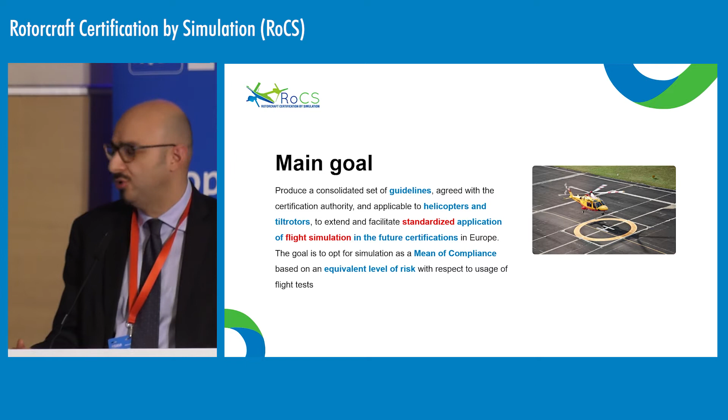And the goal is really to give the applicants the option to opt for simulation as a means of compliance based on an equivalent level of risk with respect to the usage of flight test. So I should probably clarify what we mean by an equivalent level of risk, because it could be quite misleading. For us, the risk is the probability of failure of a correct compliance demonstration times the consequences of this failing of correct demonstration.

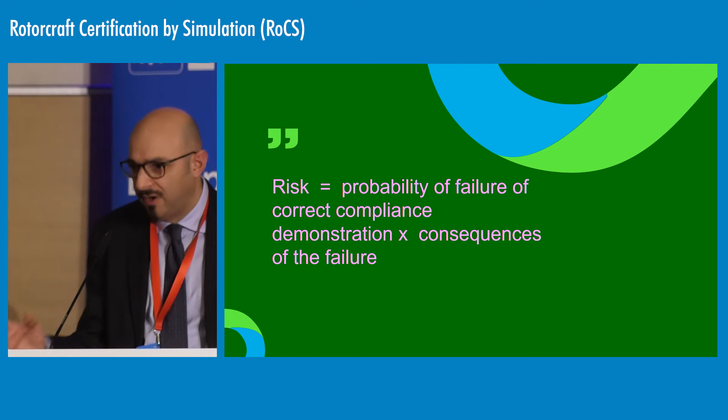So if we can bring the simulation up to the same level of a flight test, having the same level of risk, we will be successful in increasing the number of applicants that will use simulation instead of flight tests to certify at least portions of the certification activity of the aircraft. Of course, that will mean that the level of substantiation of the simulation to flight correlation should be commensurate with the level of compliance, meaning that the closer we are to being non-compliant, the higher should be the fidelity of the simulation. So this would really bring the risk to zero, possibly. But of course, this is a great challenge to be achieved.

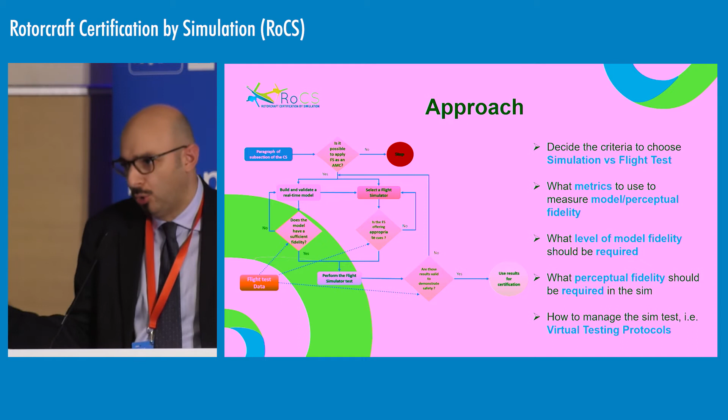Then we will have to develop a model that is able to achieve the required fidelity and to find or develop hardware that is able to bring the cues up to the level of fidelity that is required. If this is doable, maybe with some iterations, we can go and perform the flight simulator test. Of course, we will get some validation comparing what we do with the available flight test data. And then we will eventually produce documentation or output that could be used for the certification of the aircraft.

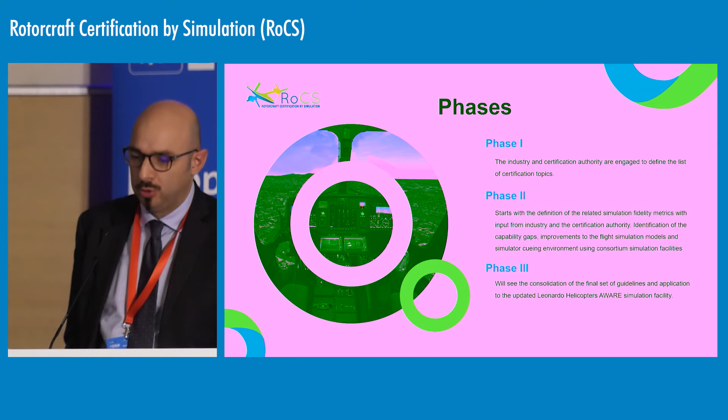This is just a brief overview of the schedule. We just started in June 2019. Right now we are entering into the crucial part of the project, that is phase 2, and we expect to complete the work at the beginning of 2022. We plan to organize the project in 3 phases. In the first phase, the one we are completing now, we engaged EASA as certification authority, and industry, in this case Leonardo, to define a list of certification topics that are of interest and suitable to be performed by simulations.

Then we will start the second phase where we'll really have to do the work of definition of metrics, both for perceptual fidelity and for models, to understand what are the capability gaps in terms of capability of modeling and capability of delivering the right cues in the right simulator, and try to fill the gaps and develop models that are appropriate for the task.

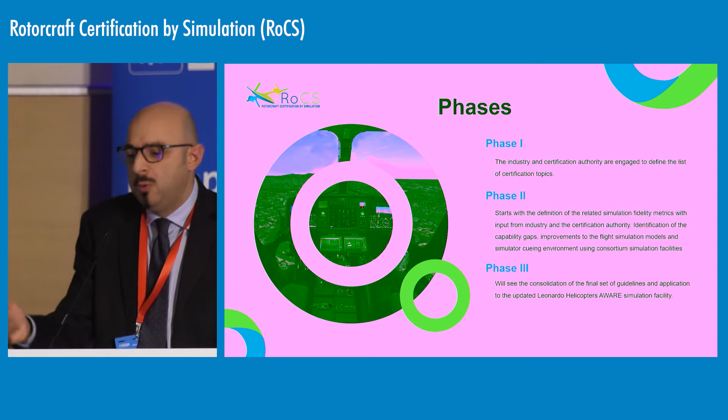Then in the third phase, we will try to apply the scheme, and so try to develop some certification tests in a simulator using a newly developed simulator at Leonardo plants. And we will deliver the guidelines out of the experience we gained in this third phase.

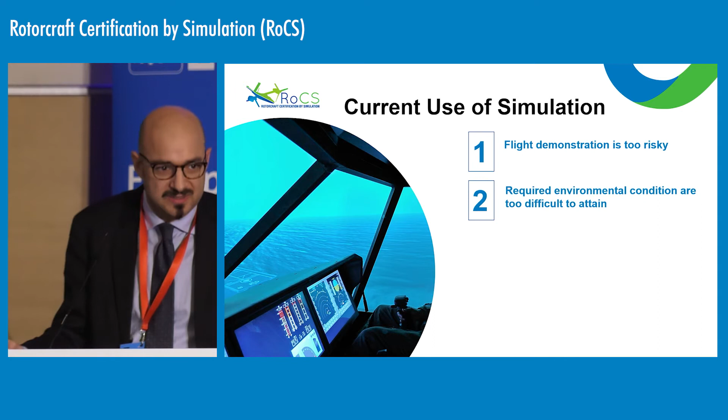So of course, we are not talking about nothing new. I'm quite sure a lot of applicants are already using simulation in some cases. The typical cases where you use simulation right now is when the flight demonstration is too risky, and in this case there is probably no other choice. The second case is the cases where the environmental conditions are too difficult to attain, or cases where you need to have repeatability and demonstration of a specific scenario with a range of pilots.

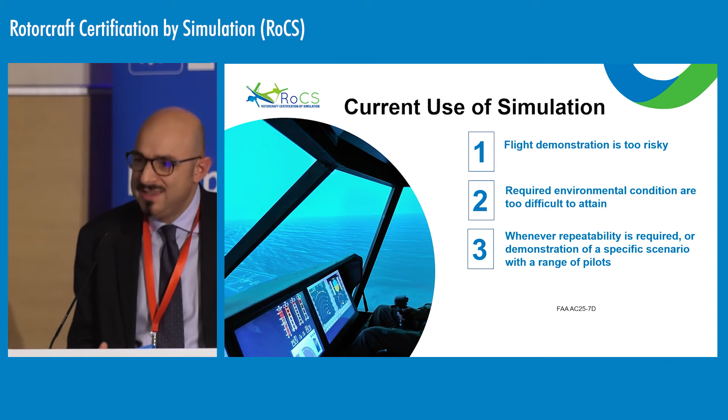So the idea we have is to extend the application of simulation out of those 3 cases to more general situations, because we expect that applying flight simulation will clearly improve safety. The simulation can anticipate risks, anticipate problems, reduce risks, and prevent risks in some cases.

Additionally, simulation will bring the costs of certification down. Flight tests are expensive. They require time, they require a lot of people. And so simulator can really reduce the costs. Also, there is no risk to damage the aircraft, as there is in some cases during flight testing.

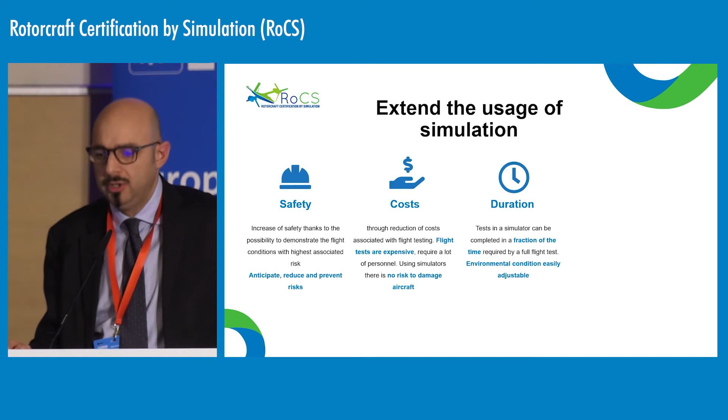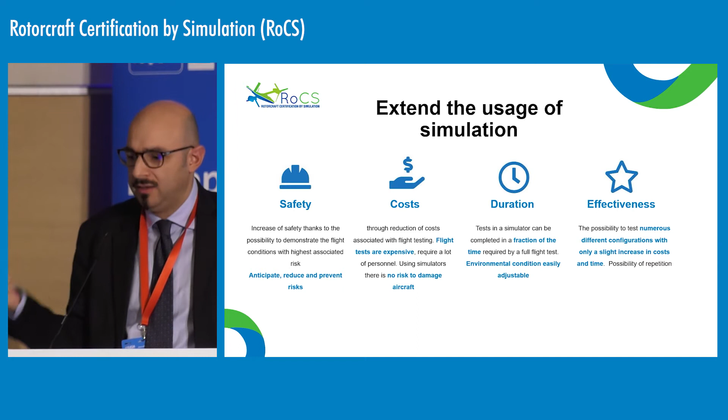Also, the duration of a certification campaign could be significantly reduced, going to a fraction of time of what is required by normal flight tests. Just to give you an example, environmental condition can be easily adjusted in a flight simulator, while when you have to perform a flight test, you have to chase the right place and the right condition in order to perform the required test. Finally, we expect flight simulators to be more effective, allowing higher repeatability of the tests and possibility to easily certify slight changes of configurations using the same simulator.

Of course, there are challenges, and the first probably major challenge here is extrapolation. This is taken from a guideline developed by FAA for fixed-wing aircraft, and they say the simulation should be suitably validated by flight test data for the condition of interest, but this does not mean that there must be flight test data at the exact condition of interest, because if you fly that condition, there is no point in doing it by simulation.

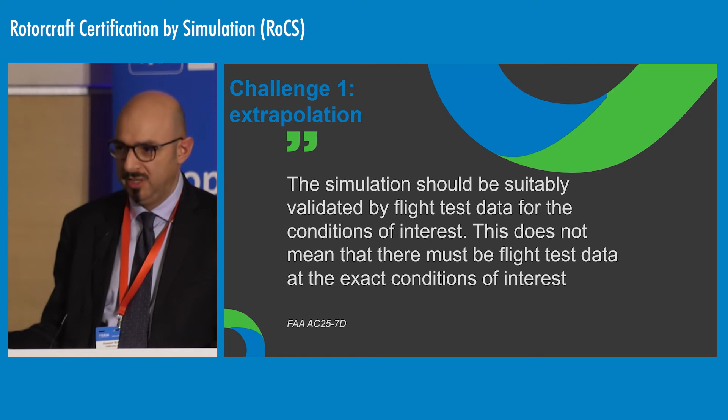So you definitely need to validate your model, but then you need to test it out of validation points. So you need to extrapolate, and you need to rely on the right physics modeling of your system in order to be sure that what your simulator is showing is reliable and is representative of what the aircraft is doing in that condition.

And so the second challenge that is related to the first one is really to develop a good credibility of the models used. And credibility means to reach a level where the user can say, I believe the simulation is credible and I'm comfortable in taking the needed decision with it, so with simulator. Because if I have to go and fly the test again, there is, again, no point in using the simulator for certification.

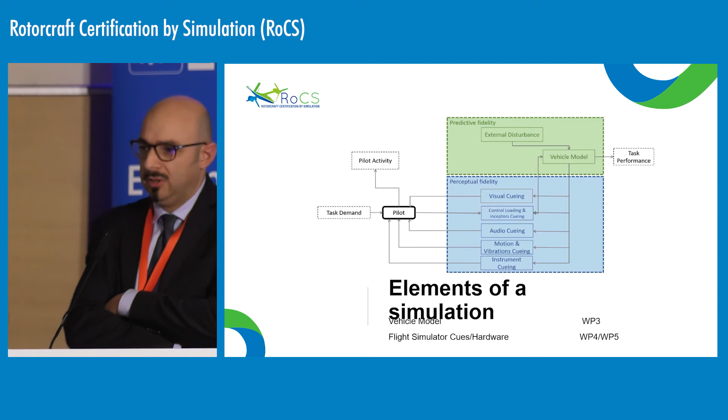So there are typically three elements that have to be considered when you perform a flight simulation. One is the pilot, of course, and the other two are the fidelity of models, and this is predictive fidelity, and here we talk about fidelity of the aircraft and fidelity of the environment and external disturbances, and the perceptual fidelity that is related more to the hardware used for the flight simulator, and so related to the cues that are given to the pilot in order to perform the task.

Simulators are quite used, but basically in the majority of cases right now they are used for training. So there is a lot of work that has been developed, and part of it is included in the FSTDH, related to how to evaluate the quality of the simulator. But this is developed for training.

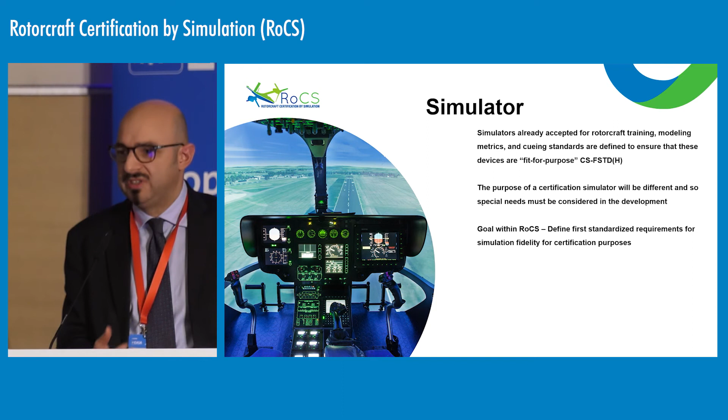Here we have a different objective. Again, we have to rely more on extrapolation, so probably we will need to develop a different type of simulators with different metrics to evaluate them, because those are not training simulators. So one of the goals of RoCS is really to define a standard to characterize those simulators and to understand what is really important and meaningful in a certification simulator.

Regarding the modeling side, we already identified some gaps of the modeling, some challenges that have to be tackled. Clearly, aerodynamic interference is one. You need to find a good agreement with models, and you need to find models that are not too demanding in terms of computational activity, otherwise they will be not functional to a flight simulation in real time.

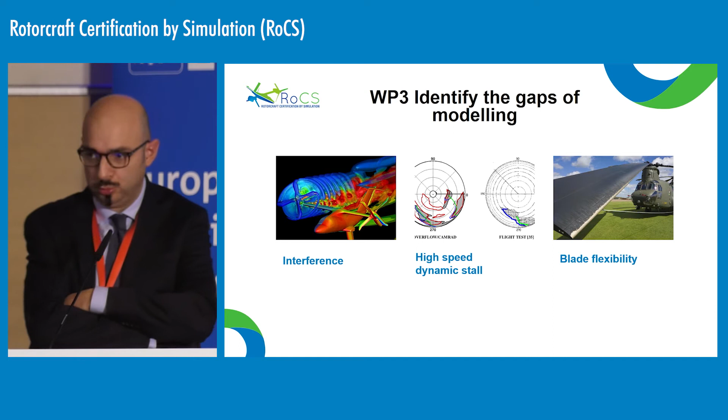High-speed dynamic stall is another aerodynamic problem that can affect performances in some cases, and it is very difficult to model right now. And other elements that could impact the response of the helicopter could be related to blade flexibilities or in general aircraft flexibility. So those are clear challenges. The other challenge is the extrapolation, the prediction.

Because typically when you develop a model for a training simulator, you already have your validation points that are filling your operational envelope and/or your normal envelope, and you interpolate between them. In this case, we will go outside the envelope of validation points, so we will need to perform a prediction, and we will need to extrapolate the models up to a point where we do not have validation data. So we need to evaluate the predictive capability of our models.

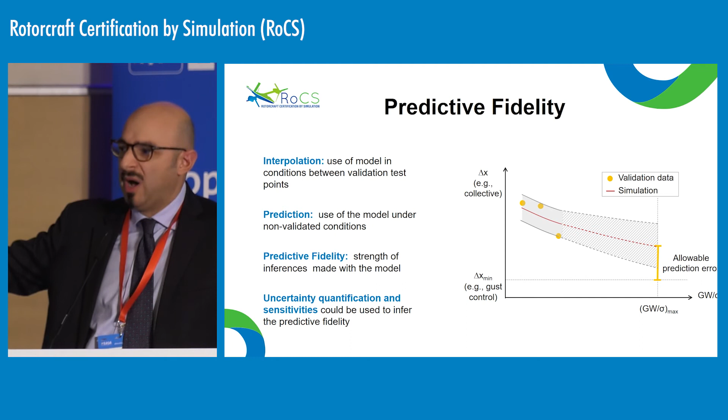In this case, we are planning to use uncertainty quantification and sensitivities in order to understand what is the maximum error that we can expect out of our model and compare the maximum error with the allowable prediction error, where the allowable prediction error is the distance between our model and the boundaries of compliance. So if we are well within the boundaries of compliance, we can clearly state that the model is reliable enough for doing the job for which it is developed.

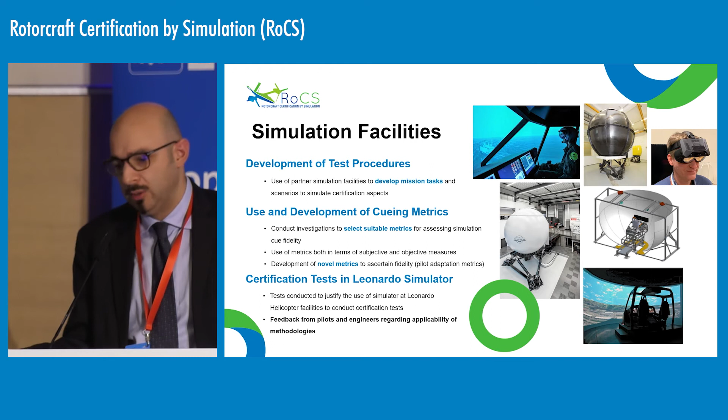Other works that have to be performed are related to development of test procedures, development of appropriate metrics for cueing, and in some cases we will have to develop new metrics because again the objective is different, and the final work will be the performance of certification tests in the Leonardo simulator. So we are planning to build within the project a new simulator that will have the characteristics required to be a simulator for certification.

So we will try to limit in the modeling the non-physical tuning of the models. Again, we will have to rely a lot on extrapolations. We will try to limit as much as possible the relevance of pilot evaluation in adapting the models, because again, if we adapt the model too much with non-physical tunings, we lose the possibility to have a reliable model for certification purposes of the aircraft.

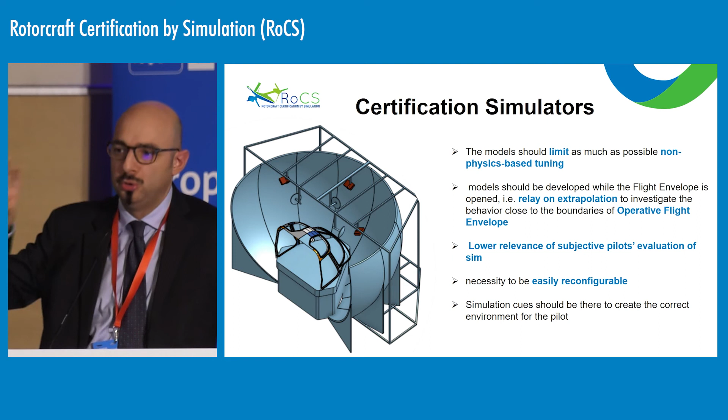And one other aspect is to develop a flight simulator that is low cost. Because again, if we bring the cost of the simulator to a very high value, then there is probably no value anymore in using simulation instead of going to flight tests, especially if the simulator has to be exactly tailored to your helicopter. And this means that you have to develop a new one for a new helicopter, and so on and so forth.

So we already performed the first analysis of the CS. And so I can anticipate that those four indicated here are going to be the main scenarios where we will apply our approach. The first one will be the analysis of Cat-A maneuvers, and in particular rejected takeoff. The second one will be related to low-speed controllability, in-ground effect and out-of-ground effect, especially the idea of extrapolating in altitude. The third one that we will tackle will be dynamic stability, both in VFR and in IFR conditions.

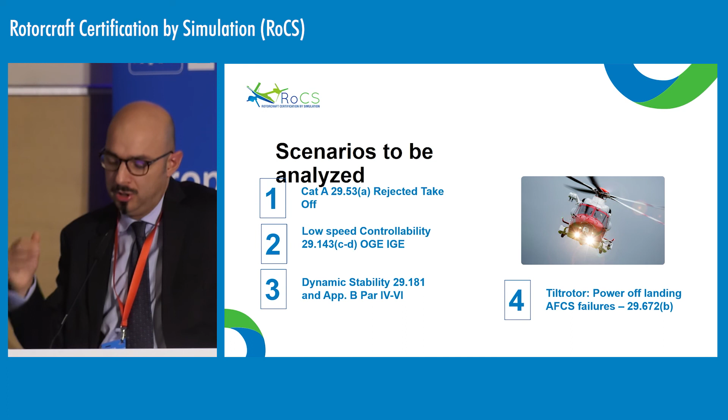And the fourth one will be related to tilt rotor, since the whole goal of the project in the end is to develop procedures that could be applied for the certification of the next generation tilt rotor. It will be related to power-off landing and AFCS failures, which are a major certification problem when you talk about a fly-by-wire aircraft such as a tilt rotor.

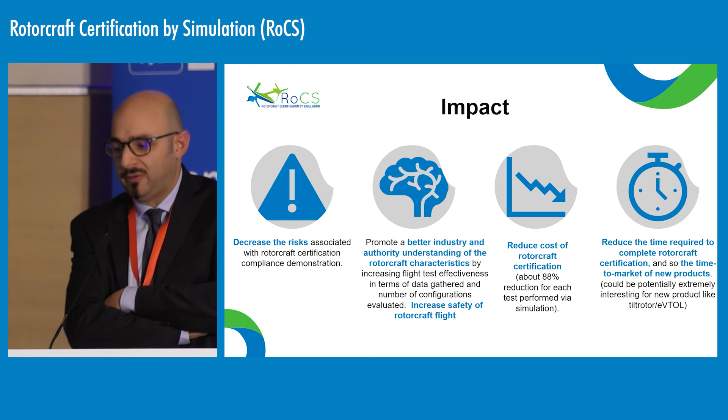Regarding the expected impact, we expect to decrease, of course, the risk, to promote a better knowledge of the rotorcraft characteristics, to reduce costs. Potentially, we can reduce the cost of a flight test campaign by 90%. So there is a high potential here that is justifying the investment. And of course, there is also the potential to reduce the time required to complete a rotorcraft certification, and so the time to market of a new product. And again, think about the effort required to bring a tilt rotor to market.

Last word about dissemination. We are planning to have a showcase workshop at the end of the program, so in 2022. We will ask stakeholders to participate, and the workshop will allow the stakeholders, pilots, manufacturers, to participate in a demo of a simulation test for certification.